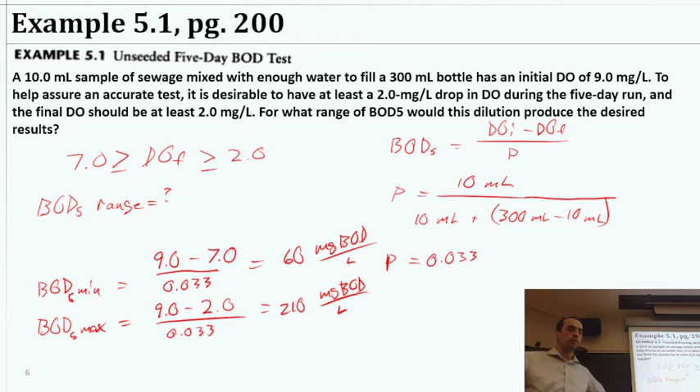You might remember we were talking about BOD tests. You talked about that before, so that was good. I showed you this example problem, gave you the chance to work that on your own if you wanted to, but I just had the text up there from a previous occasion. We'll go through an example or two today, it'll probably help cover that as well.

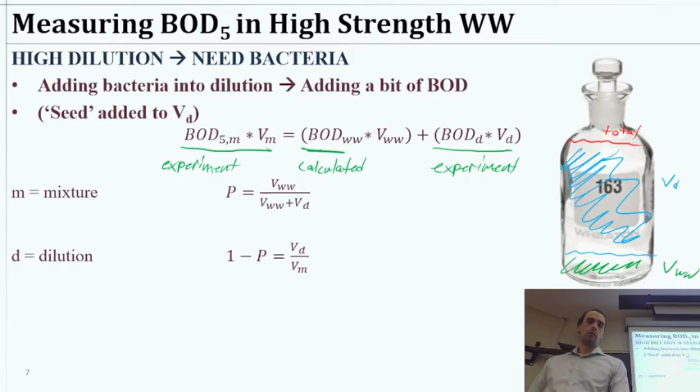So then we talked about what happens if you need to dilute a BOD test quite a lot, and you're going to have to dilute it so much that you have to add bacteria so that there's something biological that can actually grow. That's when we had the two bottle system, where we have the mixture of both your dilution and the wastewater that you're interested in, and you have just the dilution water itself, so that you can determine exactly how much BOD is in your end result. So essentially you have both the BOD of the mixture being measured and the BOD of the dilution water being measured with an experiment, and you're combining those two together to calculate the BOD of the wastewater.

So that was the scheme, and if you simplify this in terms of the other components, so that you're dealing with just the dilution factor instead of these - the P wastewater, or the volume wastewater, volume dilution - you can put it all in terms of P, and then you get this equation down here. So it's just a bit of algebra, and you get that. I'm going to post the equation sheet I would normally give for final exams. It will include this equation on it, so that may be a handy way for you to create your own equation sheet.

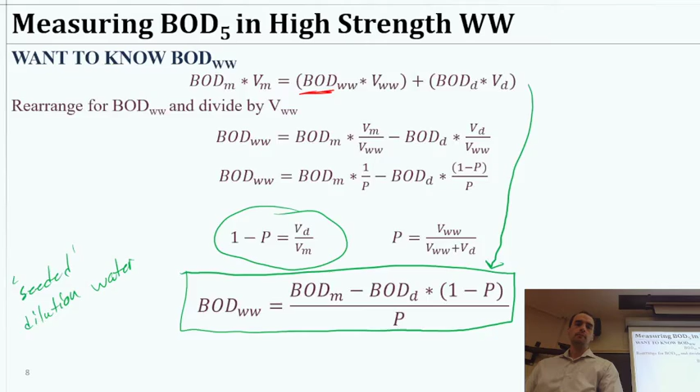Okay, so in essence, what we would do experimentally is we'd have some mixture. So this is our wastewater plus our dilution. We'll take that measurement in that sample, and then we're also going to have a bottle of just dilution water only.

And that's going to give us our BOD for two different systems, and we'll combine that to get our final. If we take a look at that equation here, we have this in terms of the BOD of the mixture and BOD of the dilution.

Well, in this next equation, I have it in terms of DO initial minus DO final. It's kind of the way we do BOD, right? I also have B initial and B final here. That's just the way my book that I use writes it. So B is simply the dissolved oxygen, the DO, in the dilution vessel.

So DOI is the dissolved oxygen initial. BI is the dissolved oxygen initial in the dilution case. So it would be BI and BF here, and DOI and DOF. Okay, so that's just clarifying what we're talking about there in terms of that equation.

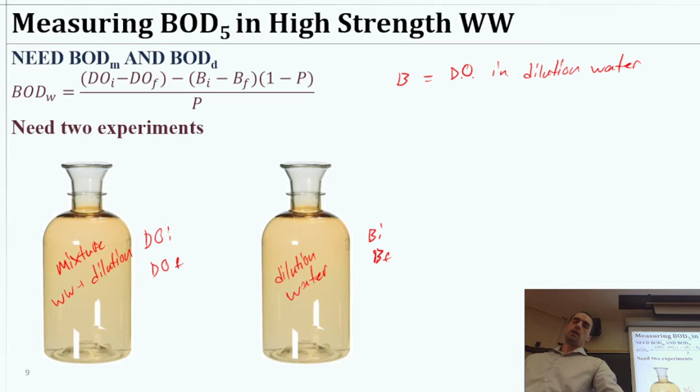Okay, so I'm going to give you a chance to put this to use. This is going to be very similar to the BOD stuff you covered in the past, plus this little extra bit using this new equation here.

So we have a test bottle containing just seeded water, has its DO level drop by 1 milligram per liter in a 5-day test. A separate 300 milliliter bottle filled with 15 milliliters of wastewater, and the rest is seeded dilution water. You could express this as a dilution of 1 to 20. So 15 and 300 is the same as 1 and 20.

Experiences a drop of 7.2 milligrams per liter in the same period. So what would be the 5-day BOD of the wastewater? Take a couple minutes and see if you can solve this on your own, and I'll work through it with you in a minute.

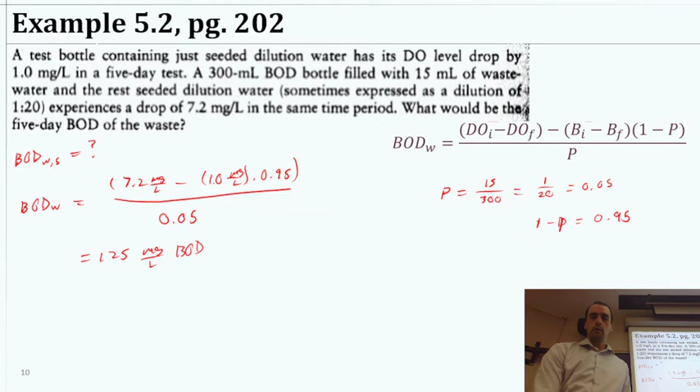All right, so that's all I wanted to say about the BOD measurements themselves. Only slightly more complicated than what you'd already done, I think, if you hadn't seen the dilution water.

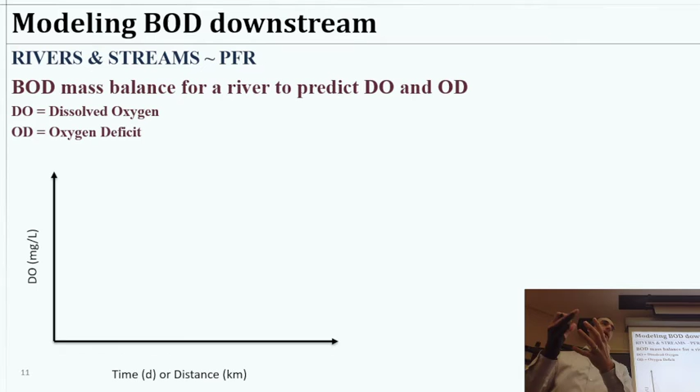Next, I'd like to get to modeling BOD downstream, specifically so we can understand something about when does the oxygen reach the lowest point, how far downstream is that going to be, how much time after the waste is discharged, which is related to the distance if you've got a stream flowing pretty constantly. So that's an important analysis for any time you're discharging wastewater to a natural body of water, because you want to know where to measure to see if there's any bad impacts, or at what point would you expect the worst impacts.

For dissolved oxygen deficits. Okay, so there's a few parameters involved, right? We've got the amount of food that's going through, and that's being eaten by the bacteria and stuff, and that's decreasing over time. You've got the amount of dissolved oxygen in the water, and that's being depleted by the biological activity, but also added back in just by nature of the water being in contact with air, right?

So we've got oxygen being put in, oxygen being taken away, and how do we know how that's varying over time? Well, that gets us to these mass balance type models of what's going on. So I know you guys didn't specifically cover mass balances, but I'm going to give you the rundown on the simplest case, which is a batch reactor.

A bottle of water, a jar, something, there's no flow going in or out. It's just some water here, right? And then that means if we've got some accumulation of oxygen or maybe some depletion of oxygen, it's all in that closed system, right? So let's describe that as a batch reactor.

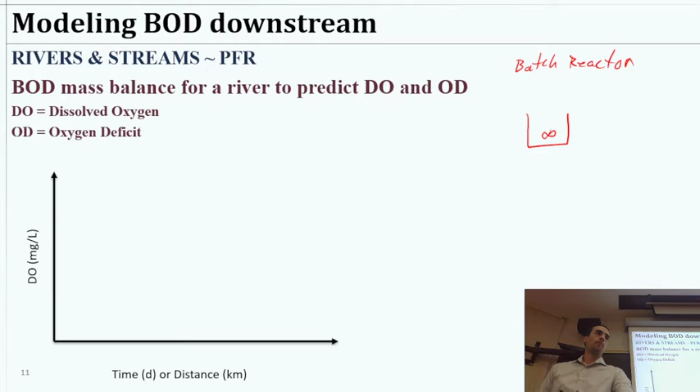We have some vessel, we're going to assume it's completely mixed, and there's no flow going in or out, okay? That's our batch reactor. If we want to take a look at the accumulation of something in it, we'll take a look in the volume.

We have some change in concentration over time. That's going to be our accumulation. That's going to be like a bank account. You've got the account, and if you have no income or expenditures, the only thing that happens in there is whatever interest rate, okay? So we're going to take a bank account with no inputs or outputs, just interest as a reaction.

So that's going to be equal to essentially the reaction term. We can be a little more specific with that and write the reaction term as a negative, some rate constant, let's say decay, times C, and maybe a growth, K growth times C, something like that. And that would also be in a volume, so we'll say whatever reactions are occurring in that volume.

So the simplest case of this batch reaction, let's just say we have zero growth for a moment. The volumes cancel. And so a simple term of a first order decay here, don't worry about the first order, that doesn't make sense, I'm not too worried, is minus KC. So it's a constant. And to get this in a usable form, we need to integrate.

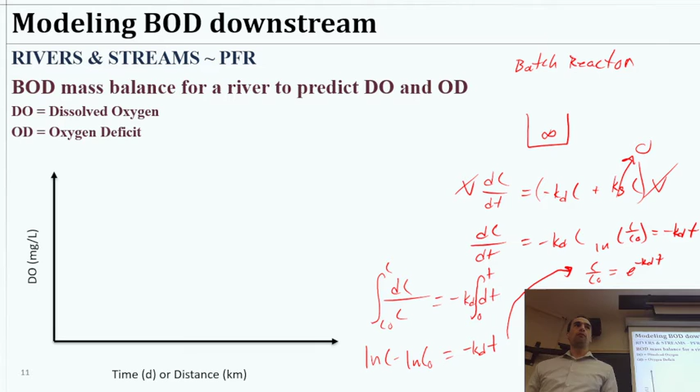That would become natural log, this is just one of the algebra tricks, of c over c naught, is equal to minus k times time. Or we could take that and raise both sides, take e to the power of both sides to get rid of the natural log. So that becomes c over c naught equals e to the minus k dt. So that's a form you've seen a million times before. We just derived it from this mass balance of a batch reactor, okay, with some specific type of reaction.

Just wanted to put that aside here to show you how the math flows from the idea of a mass balance. What's happening, there's nothing coming in, nothing going out, just some sort of reaction happening inside. We can do that with fancier reactors with flow going through them, all that, but it's essentially the same process. We want to know if there's accumulation and to describe the system accordingly.

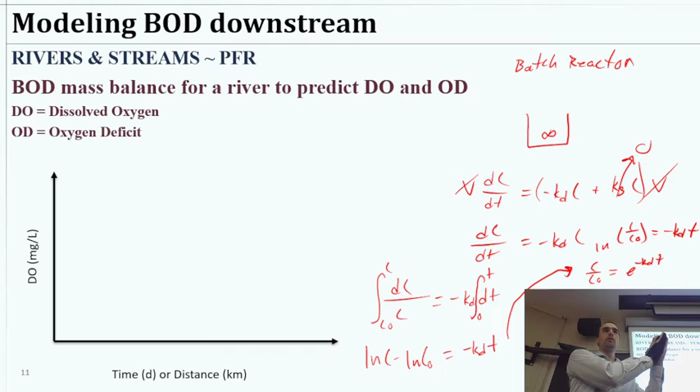Okay, I say that because when we talk about a plug flow reactor, it's essentially a batch reactor on a conveyor belt. It's like you assume that whatever you have happening up here at the start of the river is not mixing with the stuff at the end of the river, right? There's no mixing from the start of the Mississippi to the end of the Mississippi.

It's mixed probably within a little small area, and in this plug flow reactor system, we basically assume it's perfectly mixed in a very, very, very small slice. And then that slice is just moving through like a batch reactor on a conveyor belt, okay? So this is essentially a plug flow reactor.

So this is analogous to a plug flow reactor, except instead of just letting it sit on my desk for an hour, we're going to put it on a conveyor belt and see how far it goes in that hour. That's the difference. We have water flowing through, and you can have continuous flow, but we're treating it like a batch reactor, so whatever reaction is happening is happening to all of the water flowing through.

That's essentially what's happening to our oxygen while we're depleting it, along with the BOD. For oxygen, biodegradation of stuff is depleting oxygen - that's a decay reaction dependent on how much food is in the water for the bacteria. On the flip side, the oxygen deficit is causing reaeration, because air likes to be in equilibrium with water in terms of oxygen. We have about 21% of the air we breathe as oxygen - a smaller portion goes into water, but it's a defined portion. It's an equilibrium reaction, so if you take all the oxygen away from water, the air will push oxygen back into the water. That's happening at the same time.

What's going to happen is the dissolved oxygen will decrease given the oxygen demand, and eventually it'll come back up near saturation. The way I drew it looks like it hits saturation - typically it's not going to quite hit there. That happens because the stuff in the water is demanding oxygen, and at the same time the air is restoring oxygen. But there's going to be some amount of time where we'll eventually hit a minimum, and that's going to be our critical point.

We could call that the time critical, or if we're doing distance as x, that critical point there - that would correspond to some distance downstream.

Does it look like the saturation or like the original level? Does when it levels up from the right side, does it contribute to the saturation? Does it go to the saturation, or only the original level it was at?

Yeah, that's a good question - I didn't draw it particularly well. Does it get all the way to saturation? If there was really no sources of oxygen demand at the end of all this, it could, but that's not really realistic. Most bodies of water have some natural organic matter in them, so there's going to be some oxygen demand. If I were to draw it a little more carefully - it would probably look something more like that, reaching somewhere up there. It just depends on the dynamics of the body of water.

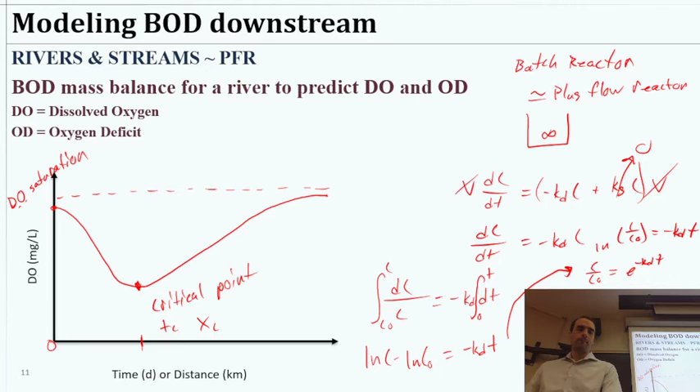Another tool we can use is a term called total organic carbon. This is just another metric of how much biodegradable stuff is in the water. I'm only introducing it because it's common to use for this type of setting. You often will measure TOC in a body of water. It's really a lot like the COD measurement - the chemical oxygen demand measurement - it's just specifically targeting how much carbon is in there. So it's related - you can kind of treat it as a decent measurement of BOD or substrate.

It's a useful tool, and what we can say is if we have a lot of TOC in our wastewater, because there's a lot of organic matter in it, then as we discharge it and as bacteria start to eat it, we'll see that decreasing over time. Again, most rivers will have some naturally in it from the sediment, from the soils running off into it, from fish and wildlife excreting waste and all that.

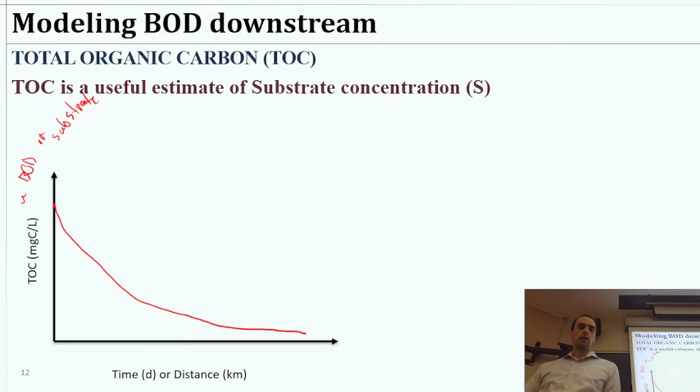But we can watch that decrease over time, and then consider overlaying that with the BOD. Let's say on the right here we'll have the TOC axis, in milligrams of carbon per liter. So we'd have our TOC decreasing over time, and the speed at which that's happening is going to be related to the amount of dissolved oxygen that's in solution.

Dissolved oxygen is doing something like that. The reason the dissolved oxygen is going back up is because it's no longer being depleted so fast. The less TOC we have, the less food, the less oxygen demand we have. So it's a dynamic system where there's essentially deoxygenation occurring from BOD, from biodegradation, and then reaeration occurring from oxygen coming back in.

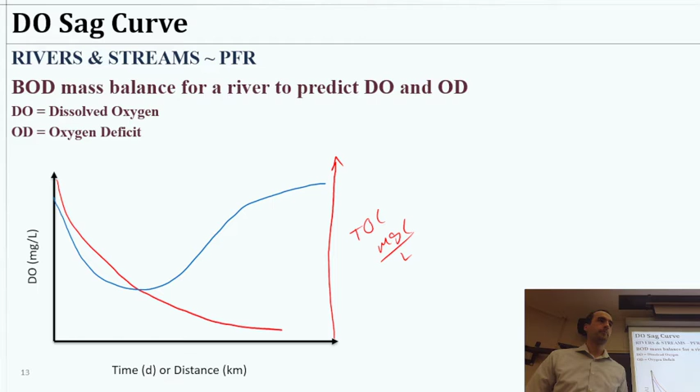Okay. Does that make sense? Any questions?

So then how quickly is the BOD removed? That's one part of the puzzle that we need to know. We talked about measuring BOD, I think you guys had already covered that. Did you talk at all about the BOD remaining term?

Okay, so let's define this new term, L. LT is the BOD remaining at time t. L initial, L naught, is the BOD remaining at time 0, or the ultimate BOD you could ever possibly have. So this gets a little

confusing at times because we often describe BOD 5 specifically. Let's take that 5 out of the equation and think about it in terms of: if you let my BOD bottle consume oxygen for 1 day and then check, you'll have some amount remaining. You'll have consumed some amount in 1 day, but you'll have some remaining, right? The thing is, a 5-day BOD test does not degrade all of the organics in there. It's just a standardized time frame where we know significant biological activity has happened.

If we take a BOD bottle and let it sit there for 10 years and measure how much oxygen was demanded, we get a closer approximation of the total you could ever demand out of it. So when we say the BOD remaining at time 0, this is like the ultimate amount, essentially that's equal to BOD at infinity. If you left it an infinite amount of time, that's as much oxygen as the biological activity could possibly demand from that sample.

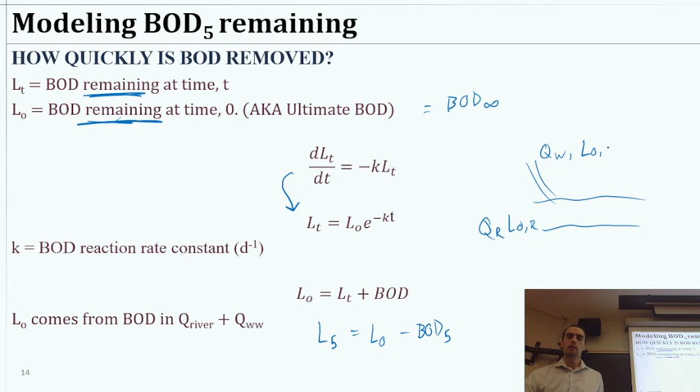Like I said, there's some biological material in rivers, and we're going to have the wastewater, we'll say L naught R, and the wastewater certainly has some BOD remaining, so we'll say L naught waste. In order to find the actual L naught we're looking for, we'll see some problems say okay, immediately downstream of a wastewater discharge, the wastewater discharges into a river, we assume it mixes well, then what's our conditions?

Because that's going to be our starting point to predict what's happening downstream. Make sense? Okay, so then this becomes, I'm going to call it a mass balance again. This is so intuitive of a mass balance that you probably will recognize, oh, that makes sense. I didn't need to call it that, but that's just what I'm going to call it, okay?

So here we have a Q for the mixture, and then L naught for the mixture is what we would be really referring to for our L naught here. This is coming from the BOD in the river plus the BOD in the wastewater. Whatever amount could be demanded from those two combined is going to be our ultimate that we're starting with at this point.

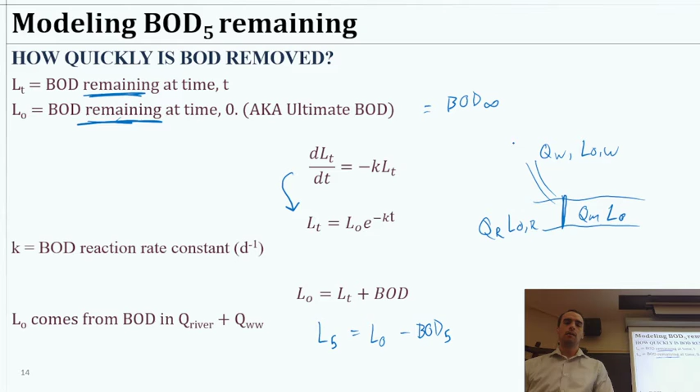So that's going to be our starting point in terms of the amount of BOD remaining. Then we can take that ultimate amount of BOD remaining, and say well, we have some rate of deoxygenation that's related to that. We have the rate at which we're deoxygenating is directly related to that BOD remaining.

So we have an equation where we're essentially saying the rate of deoxygenation is related to a deoxygenation rate constant, which by the way is pretty much the same thing as the K here. There's a caveat I'll show you in a minute from the book I'm using, but it's essentially the same thing. So essentially, it's that rate at which the BOD is occurring, or that rate constant, how quickly the BOD is being removed, times that initial amount of remaining BOD, times e to the minus KT.

Okay, so that gives us a term that can describe the rate at which oxygen is being removed at a given time, given some starting conditions.

We're going to contrast that particular rate with the rate of reaeration, which is a physical process. So the reaeration is going to be a function of how quickly the river is moving, how turbulent it is, how shallow versus deep.

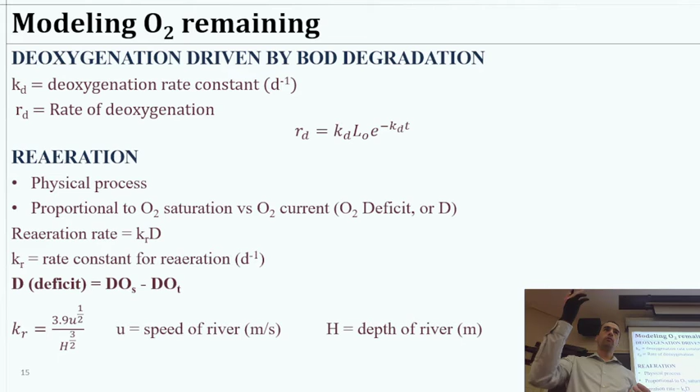And if you think about it, if you've ever had an aquarium, how do you aerate it? Well, it's either some sort of bubbler, an aerator, or you've got some water flowing through a filter and back onto the top of the water, providing some motion across the top. Essentially what you're doing is increasing the surface area of contact between the air for oxygen and the water to re-aerate it. If you have a slow, stagnant, deep body of water, you're not going to get much oxygen through it, especially if it's hot. So if you think about southern Louisiana, and you look around, there's lots of ponds everywhere.

Our soil here is rich with nutrients, all the sediment that's been deposited over the years. Basically, there's lots of biodegradable organic matter. So you add water, you've got lots of biological activity. However, we don't necessarily love that, especially if the oxygen gets depleted and it starts stinking because of anaerobic processes, kind of smelling maybe like wastewater or something. We don't want that, so you'll see fountains everywhere. The fountains in the ponds here largely are to aerate the pond, to keep it nice, keep it fresh. They're beautiful, but also they're keeping the pond aerated so you don't have cases where you have too much deoxygenation occurring just based on the natural dynamics of those ecosystems.

Okay, so reaeration then, in addition to those physical processes that are important, it also matters how much oxygen is missing compared to saturation. So if we talk about the amount of oxygen that we could have, the saturation, earlier we drew the dotted line and said okay, well, we're usually kind of below that and might reach up towards that. Well, the difference between that saturation and some point along our curve, that's going to be our deficit. So the amount missing from the max is our oxygen deficit. We're going to call that D.

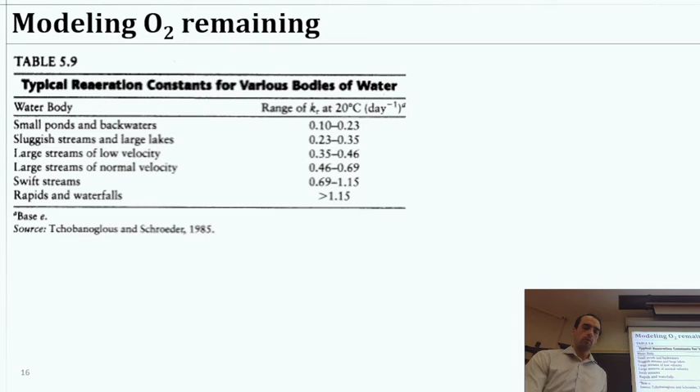I guess I missed the caveat - don't worry about it. It's just that KD is pretty much equal to the rate of BOD removal. The rate constants are essentially the same in many cases. In some cases they're different, but you don't have to worry about it.

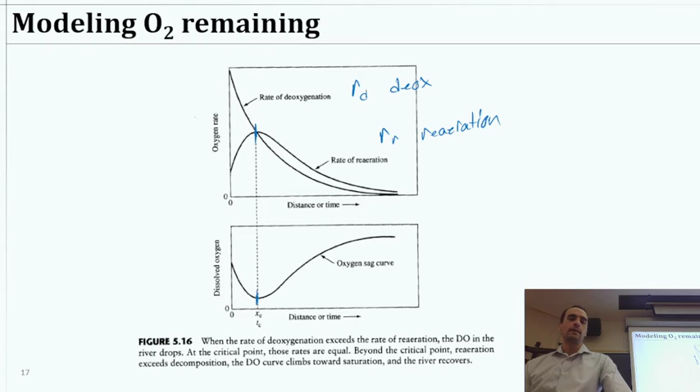Different story, but same process happening here. It's about how quickly these elements are being transformed in that system, and at what time you're going to hit that critical point, the danger zone.

To model the deficit, we have an initial deficit, DO initial, and then a deficit at some time t. We want to know dD/dt, the change in deficit over time, to get an equation for the system. That's equating deoxygenation, which feels backwards since we have an oxygen deficit. So the deoxygenation rate is increasing the deficit minus the reaeration, which is decreasing the deficit.

We can rewrite that as dD/dt equals kd times L naught e to the minus kd t, minus kr times D. Okay, so your job is now to integrate that.

But no one's laughing? Okay, good job. It was a joke, okay? I was hoping someone would just smirk, like as if. I probably didn't give you enough time. Okay, just kidding, I don't want you to bother with that. Probably something you've learned in differential equations, I would imagine. Probably something I learned in differential equations too, I bet, one day, a long time ago.

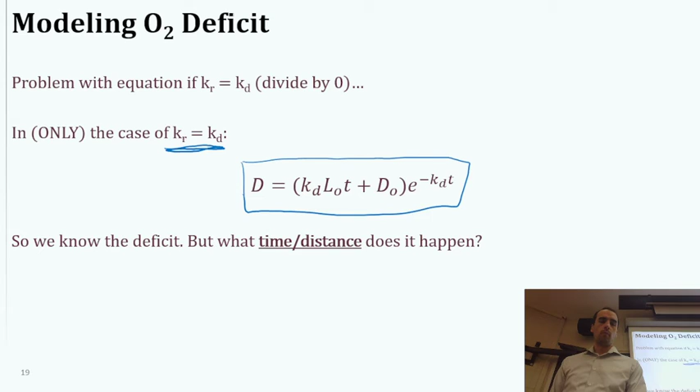Okay, maybe mathematically there's some other way. I'm not interested in that. I'm sure there's something to be done.

And then of course, if we have a stream or river where we can assume the velocity is constant, then we can say the distance is equal to the velocity times time, or the time is equal to the distance divided by velocity.

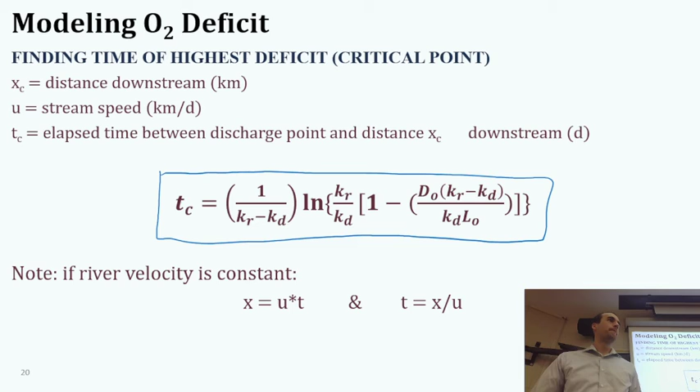All right, any questions on that? Yeah, can you go back like two slides? This one? No, the slide before that. Yeah, between the K and K sub D.

Okay, so the K and the K sub D, essentially they're the same. That was the caveat I meant to mention, we'll just treat them all the same. I meant to add a slide here, I thought I did, and I didn't save or something. I taught this class earlier today and had the same exact question, and it's like, shoot, I should know this, and I don't know. So the book actually provides a few sentences saying most of the time these can be assumed to be the same.

But it actually, because essentially the K itself is how quickly BOD is being removed, and then the KD is the deoxygenation rate constant, effectively how quickly oxygen is being removed. It's the same for slow-moving deep rivers, but when you have a waterfall type situation, things change a little bit, and I think there's more availability for bacteria to interact with stuff.

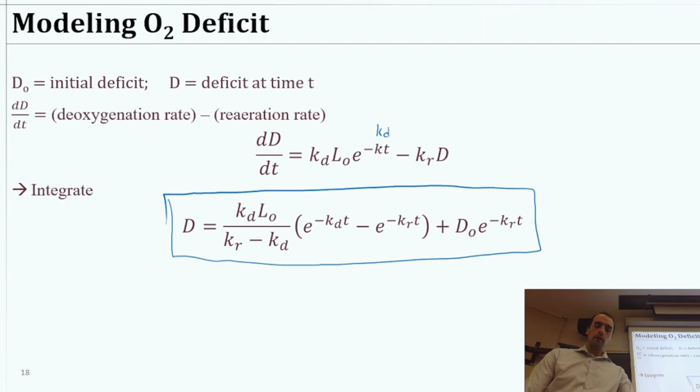In our case, we'll call it the same. Yeah, I just need to update the slides, I thought I had. So K and KD are the same, and KR is different. KR is the reaeration rate constant. That depends on the depth and the speed.

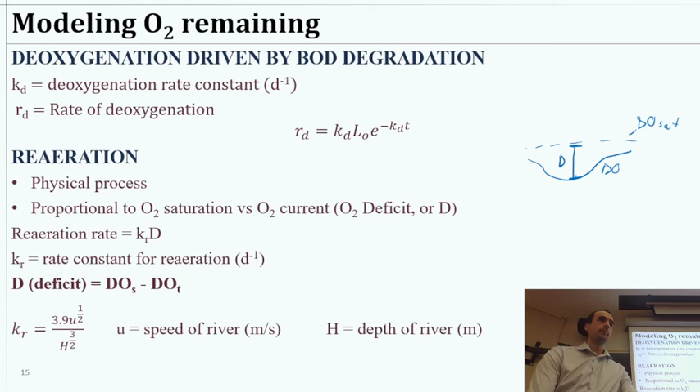Okay, so I've got a couple problems, and we're not starting all the way at the end of those equations, we're going to back up a little bit. This problem is going to deal with essentially finding that initial deficit. So we have a problem here.

It says the wastewater from some other example has a dissolved oxygen concentration of 2 milligrams per liter and a discharge rate of 1.1 cubic meters per second. The river that is receiving the water has a dissolved oxygen equal to 8.3 milligrams per liter, a flow rate of 8.7 cubic meters per second, and a temperature of 20 degrees Celsius.

Assuming complete and instantaneous mixing, estimate the initial dissolved oxygen deficit of the mixture of wastewater and river water just downstream of the discharge point.

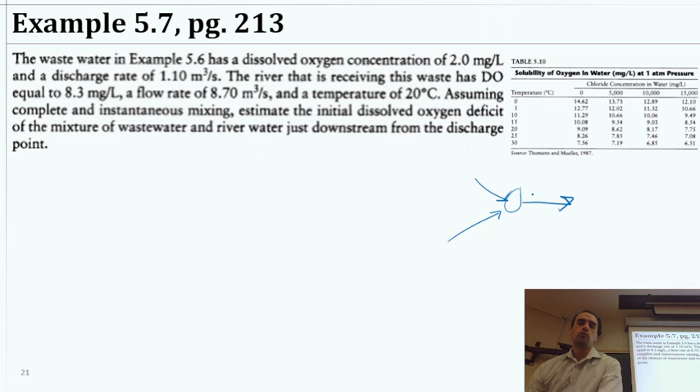Okay, so I always encourage you to draw your system first when you approach a problem. So the simple case would be just to draw the river mixing instantaneously in this little circle, making a new stream that's combined. You could draw it fancier if you want, but that's going to be our instantaneous mix spot. And then what we want to know is the dissolved oxygen deficit of the mixture just downstream of the discharge.

So we're going to say this is deficit equals question mark when we have some flow rate for the river and some DO for the river, flow rate for the waste, and DO for the waste. The book here is referencing some other problem, and it gives us a temperature.

Essentially, we have different amounts of oxygen that can dissolve into water based on the temperature and based on chloride concentration and stuff. We're just going to assume that we're at 20 degrees Celsius, and we'll say no chloride. So that's the DO saturation then, is the lookup table here, is 9.09 milligrams per liter, just coming from that table.

Okay, so work with that for a couple minutes and see what you can come up with.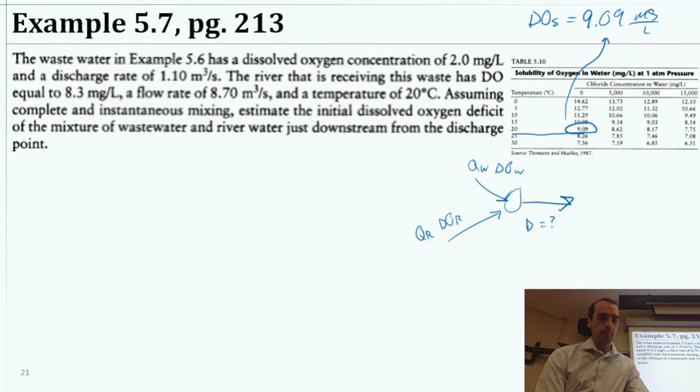How did you know which concentration to use for? I'm just assuming—maybe this other example problem has some value of chloride, and then you have to look up a different spot. But this was 20 degrees Celsius, and I just took that. I'm doing that part for you because I didn't want you to have to think about it.

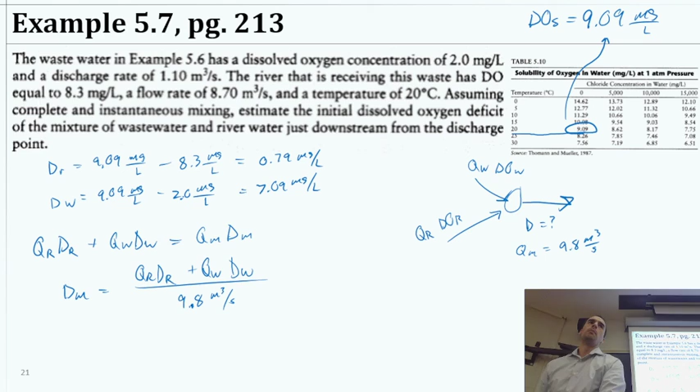So then the challenge is to go ahead and solve for the deficits here, converting from the dissolved oxygen. That's going to be 9.09 as the saturation value minus the two different values, so you get 0.79 milligrams per liter for the river and 7.09 milligrams per liter for the wastewater. And the flow rate for the mixture is the two flow rates added, that's 9.8 cubic meters per second. You can then solve for the deficit of the mixture, equal to QR dr plus QW dW divided by Q mixture, 9.8 cubic meters per second. You'll have cubic meters per second on top and bottom in each term, those cancel, and you're left with your deficit in milligrams per liter.

Does that process make sense?

Okay, let me grab Excel. So I went ahead and put these values here, and we'll say QR times dr plus QW times dW, all that divided by 9.8.

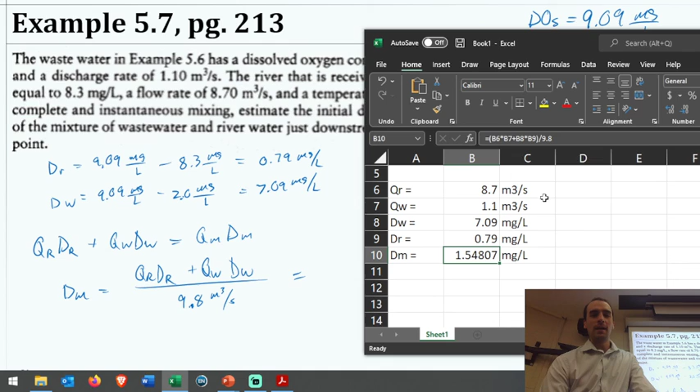Okay, and that comes out to be about 1.5 milligrams per liter. I feel like I had a slightly different number this morning, so if you see something I did wrong or entered wrong - it was like 1.5 in both cases, but one time it was 1.49 this morning and now it's 1.54. Did I do something? Do you see anything? Well, I think maybe I punched in a number wrong this morning or just now, but essentially that process is the same. The answer, fortunately, is the same. So if I did something wrong, it was small and might not have been today, or this class.

That makes sense though, you guys are seeing the two rivers coming together. That's a mass balance - there's no reaction involved, but that's a mass balance.

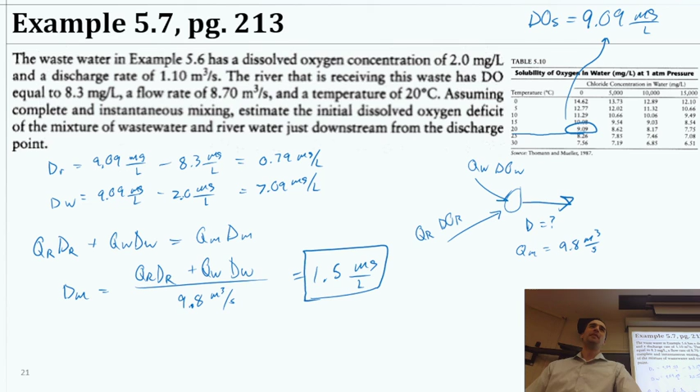We don't have enough time for this problem to go through it together, but let me talk you through it, and I'll show you some solutions I have from another time, and post them since you don't have this textbook. This one says just below the point where a continuous discharge of pollution mixes with a river, the BOD is 10.9 milligrams per liter, the DO is 7.6 milligrams per liter, and the waste mixture has a temperature of 20 degrees Celsius. The deoxygenation rate constant KD is 0.2 per day, average flow speed 0.3 meters per second, average depth 3 meters - it's a continuation from another problem.

This problem asks us to find the distance downstream at which the oxygen deficit is at a maximum, and then also find that minimum value of dissolved oxygen. Okay, let me go to it.

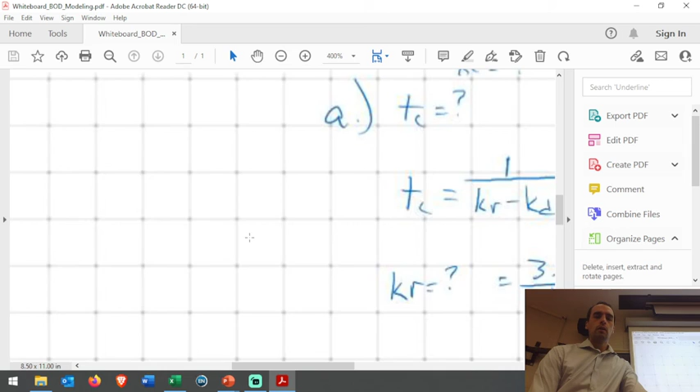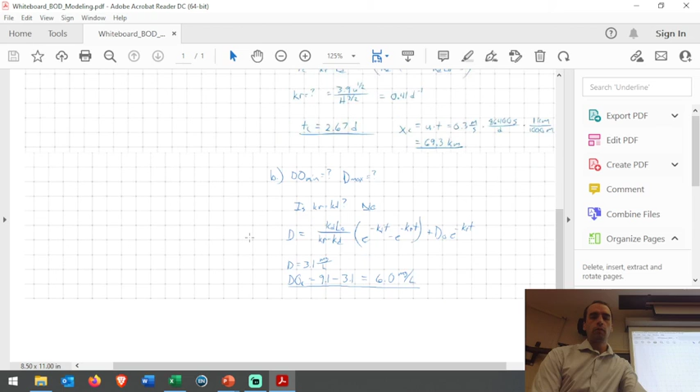I have some notes from, I think this past spring, or maybe even the one before - I solved this problem for a class, and I've got the solutions written out here. So I will post this, I think it includes the solutions to the one just a moment ago, so you'll have both of those. Take a look on your own time, might be helpful with the homework as well.

Any questions? Issues?